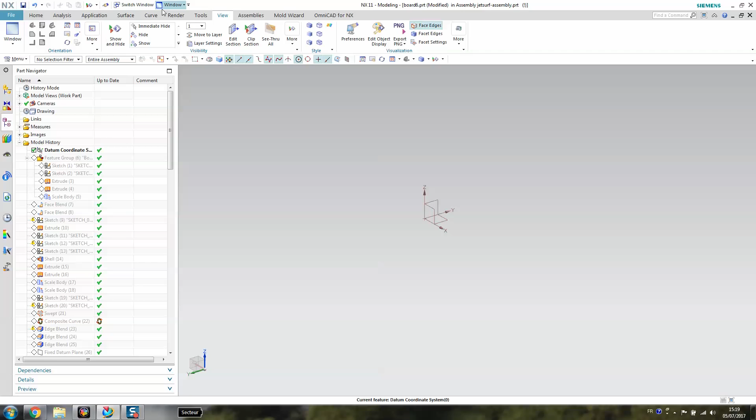So about the 3D model, I already made it, so you can see the build tree on the side. I will just go step by step to show you how we made it. First, what we did was import what we call in NX raster images. I'll show that.

Except this one that shouldn't be there. So we went on the internet to check pictures in order to get the shapes, and then we took the profile and the top-down picture, and imported them in NX.

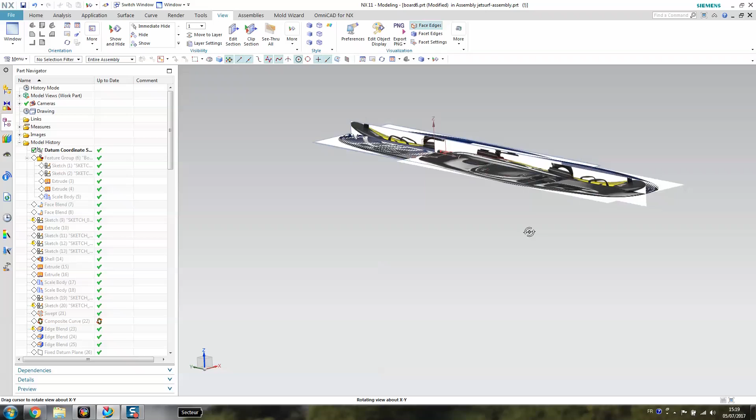After that we created two sketches which represent the profile here, using a spline to make it. We made it in one direction, and then did the same for the second sketch on the side, and then you need to extrude.

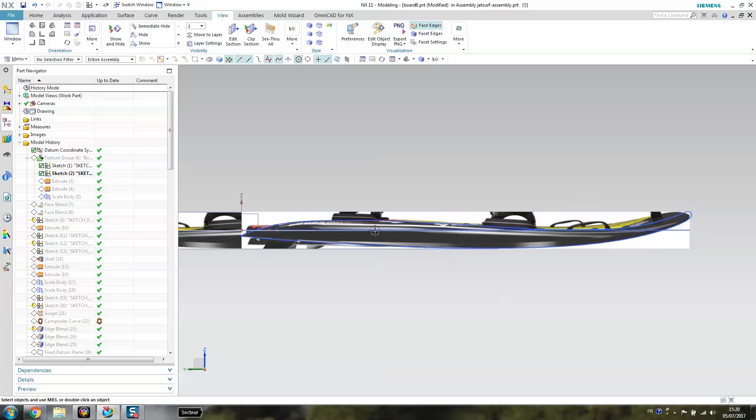So we extruded the first time to get this one. Now I'm going to hide the raster images because we don't need them anymore. You extrude the first one, and when you extrude the second one, you just keep the intersection, and that's why we have this one, because we scaled the body to make it a bit bigger according to our CNC machine.

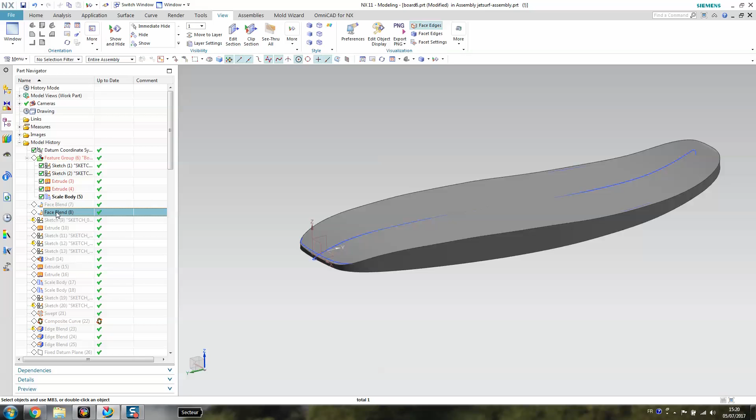And then I finished with two face blends on each side. You see, you can already start to have the shape of a Jetsurf. Then we started to make not the cover but the hole, in order to make access to the engine.

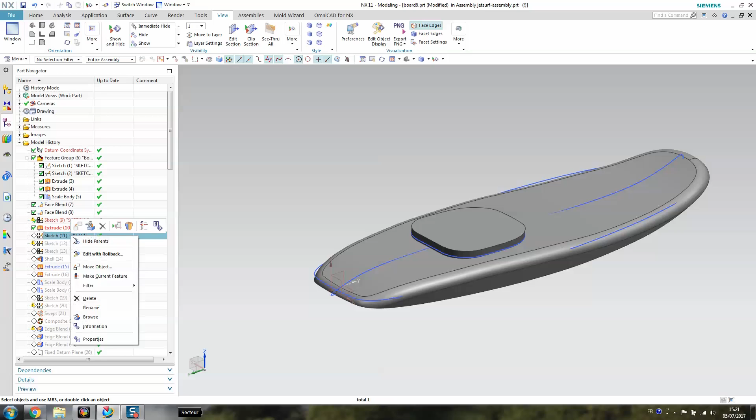Then we made a new sketch on the top here, so I'll go a bit faster. After that we decided to make a shell that you will not see inside, but if you open it, you see that now it's empty.

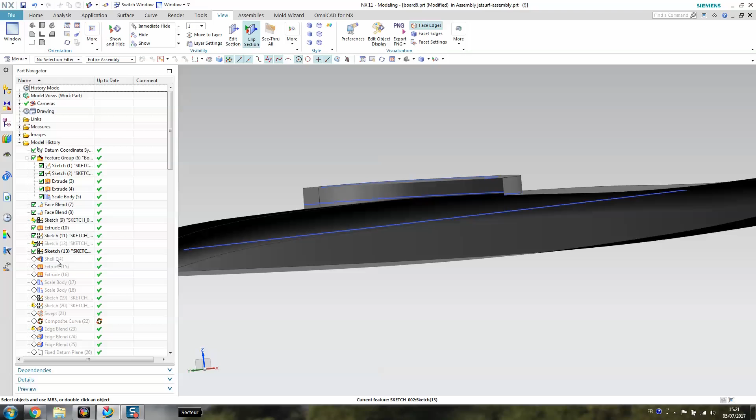We made it 3 millimeters, if I remember. Yeah, 3. So like that, now you have the Jetsurf, at least a shape.

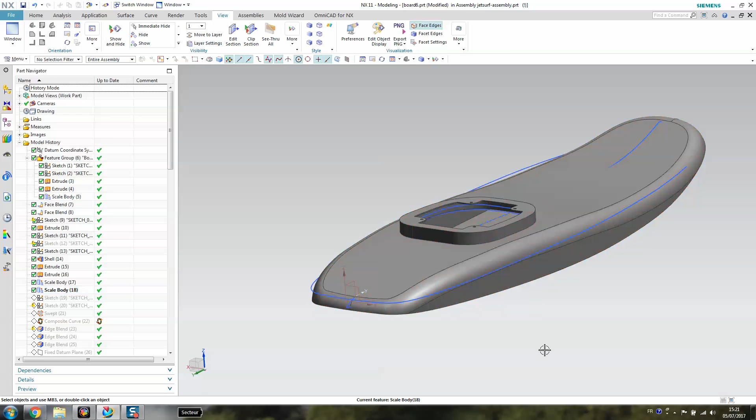We modified the scale in some dimensions because our engine was quite high, so we had to modify according to the Z-axis, but it's not a problem at all. Then after came the time to make a swept function in order to make the tunnel.

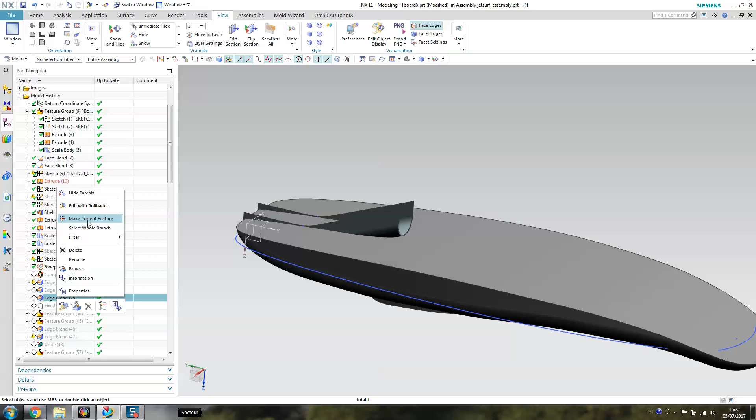How did we manage this? I'll pass over these functions, but yeah, we have to modify some stuff. This one was made with some offset, some split body, and did it. We'll not go into detail on this, but as you can see, we already start to have something quite nice.

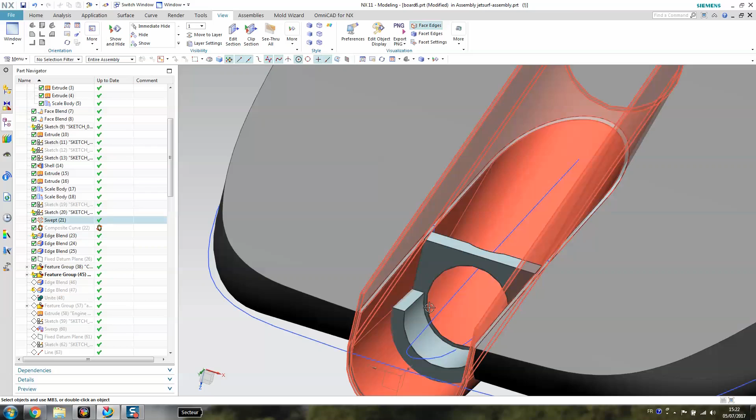The next function was to make this kind of block that will hold the housing, because we will have the axle that will pass over there.

What's the next operation? I suppose it was this one, to make an extension outside that we didn't have before.

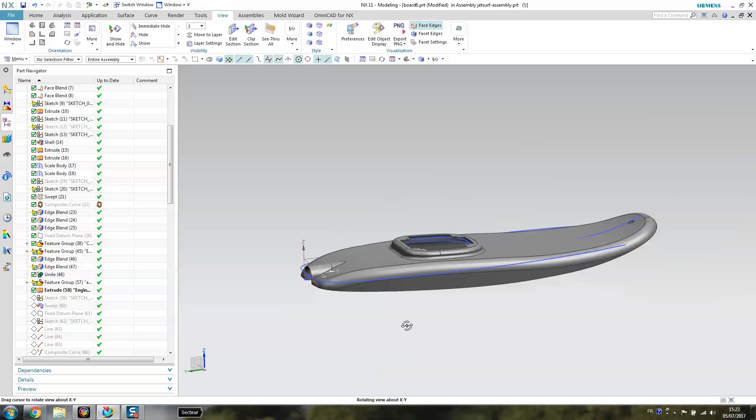Let me continue. We made another swept function for this, which is the snorkel, to let the air intake. Yeah, this one.

I'll go a bit further. You see now we already start to have something that looks like a Jetsurf. I'll go a bit further as well. You didn't see it because it was just over there.

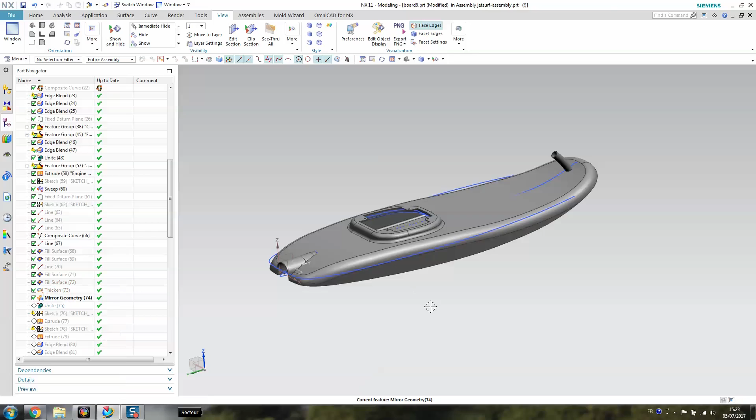We were filling some part, because otherwise the water will come there and then penetrate inside. Then we had to create some other thing.

Yeah, this one, I remember, this is just the board, so you will not see the engine now. But I can go further now.

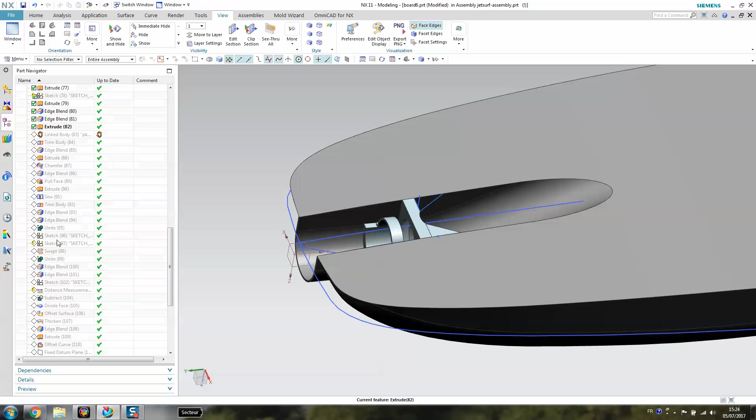So this is what we created, and then we will set up the housing and the rest just after that. So what about this?

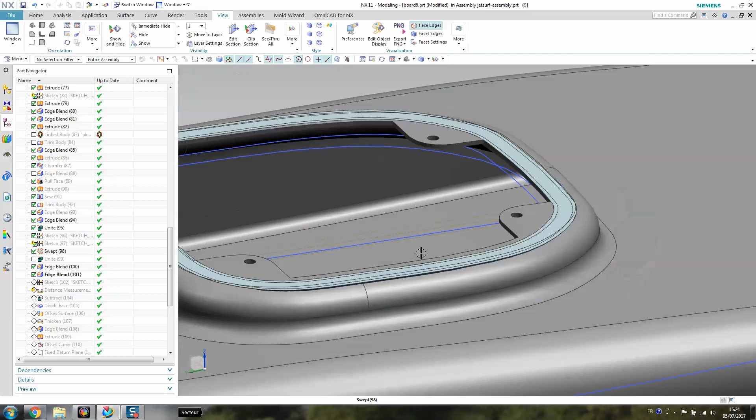We had to take care about this function, because this is where you have the gasket. We made the holes as well, and then I can go a bit further now.

I just changed the color to make it clearer, because it was white in the house. We also made some small edge blend.

Be aware that you need to have edge blend, because you will not be able to make a 90 degree sharp angle, especially with carbon fiber, so you have to be aware of this.

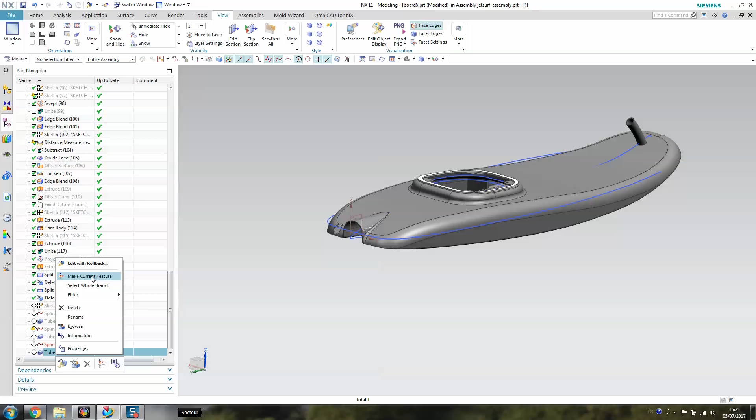And make current feature for the last one. After it, this one was just to make it like for the animation. Don't forget that I also made a stiffener here, just to be sure that it will resist.

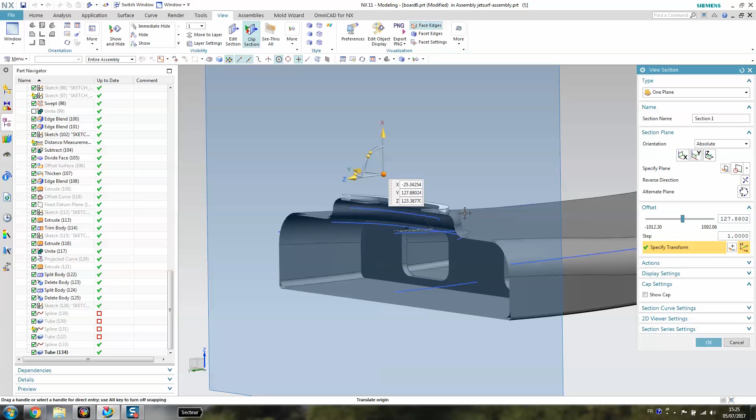As you can see, you have the board and then you have the stiffener there, which is just under the pads. So now when you have this one, the board is finished.

I will show you later how to make the mold, but at least you can see the rest. So you have the board. If you switch off the board and just take the mountassembly, yes, should be fine.

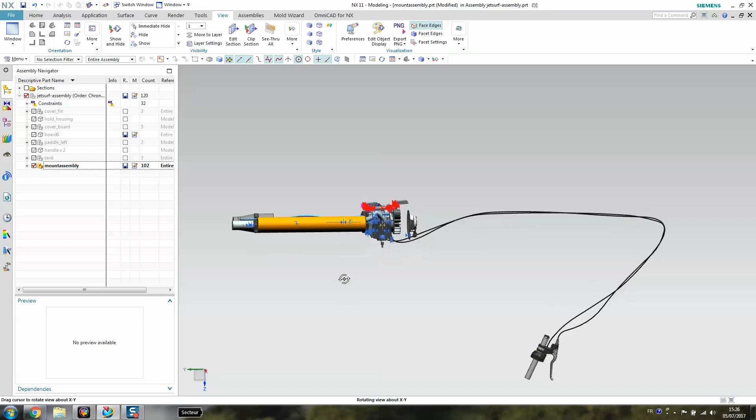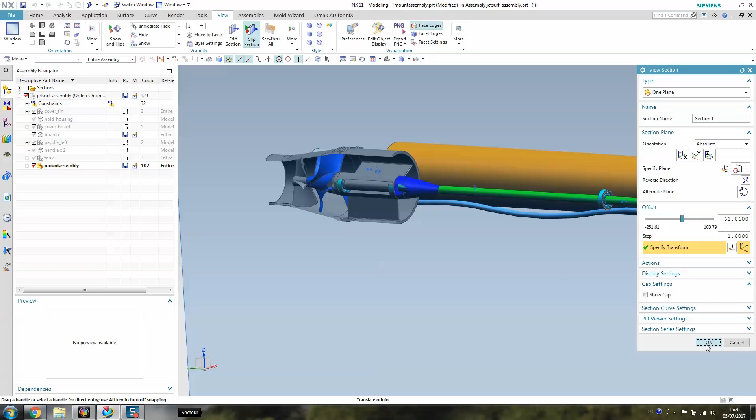So you see that you have the rectifiers that we added just over there, and then you have the impeller, the housing, the nozzle here, and then it's the rest here.

We had to make this axle coupling that I will show you later on CNC. And then when this one is finished, we made the tank as well. It was just over there.

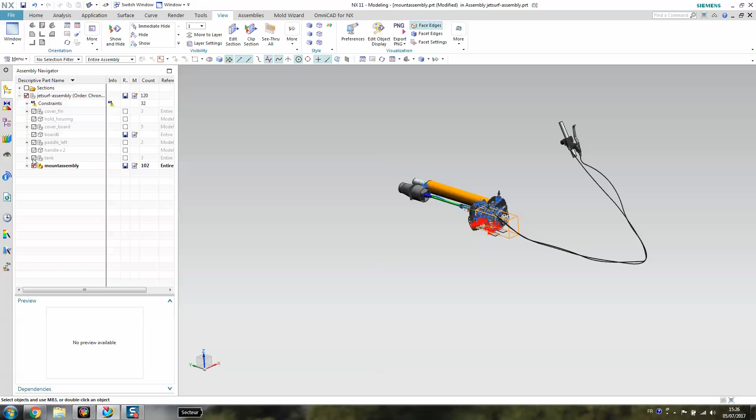And now I can just select everything. So you have the board. Don't forget to add the handle. You will not see them now, but they are here.

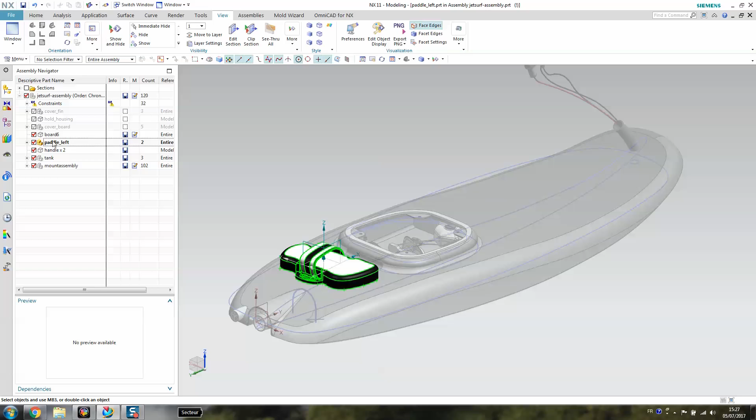We made them with 3D modeling on the 3D printer, sorry. Then after you add the left pad, and you should have the right as well. The board, the cover as well, that I will show you later how to make it.

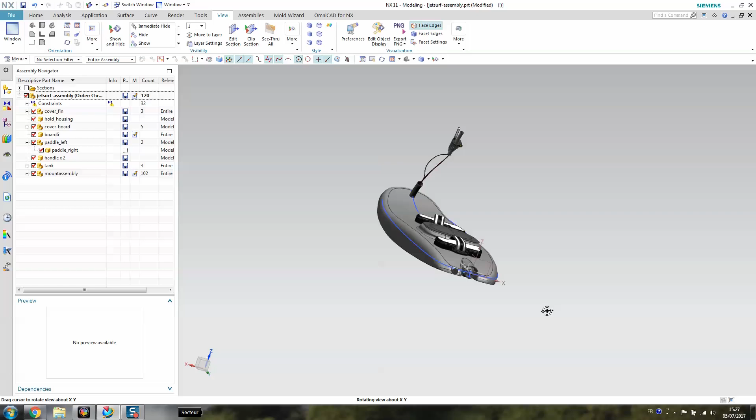On this one you have the whole thing, and then you have the fin to add. So far this is the 3D model, and now we can start to make the mold for the board.